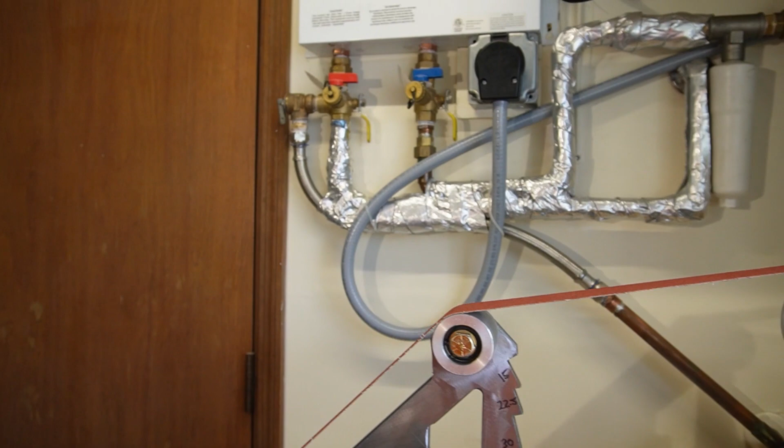Let me get you over here to the grinder, show you what I've got now. I figured I'd show you the finished product here first, and then go into some details. So here's what I've got. As you can see, I built all these pieces here in my part 3, part 4 videos. And for this video, I built the platen frame with the platen wheels on here and this tension handle.

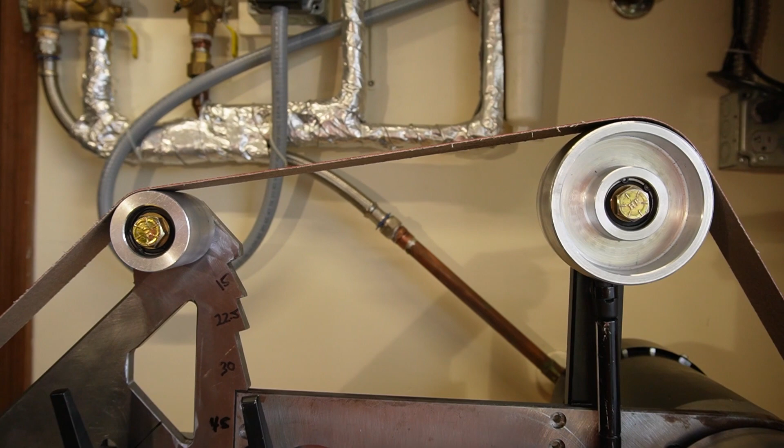Now this tension handle is quite different from Phil's design. His gas strut here is actually permanently affixed, and then he uses this lever to relieve the tension on the wheel when he changes belts. In mine, I've changed it quite a bit. I'm going to have to put the camera down to show you its operation.

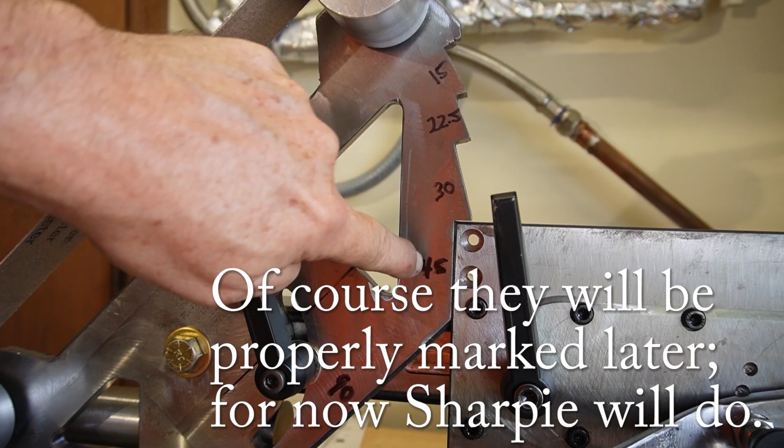And then another neat feature I've done on the platen frame is I've cut these notches here for various angles that you might typically want to use. So obviously there's my 90. I've got it currently in the 45 position just to show you here. But it makes a quick change to quite accurate angles on these guys. Very easy, which I like. Works well.

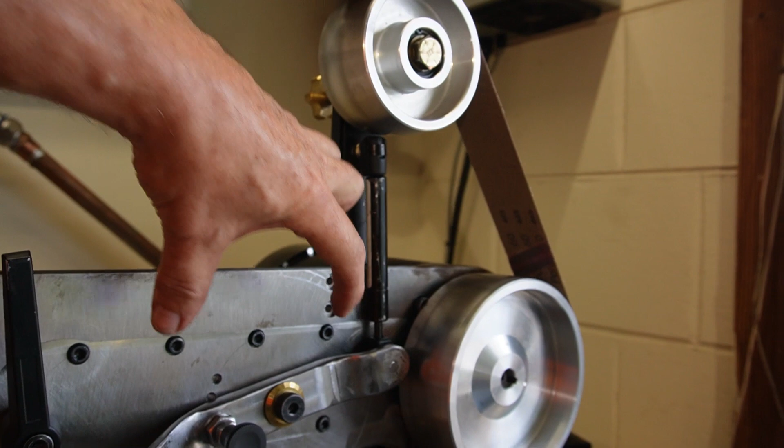And then my lever, rather than machining it out of pieces like Phil did, I just took a piece of, I believe that's quarter inch steel and bent it. I just put it in my vise, heat it up and hit it hard with my hammer to make this curvy shape, which I like. I doubled up the thickness here. I welded an extra piece in there to double it up for extra strength and extra bulk. For this, another shoulder bolt goes through there to hold it in.

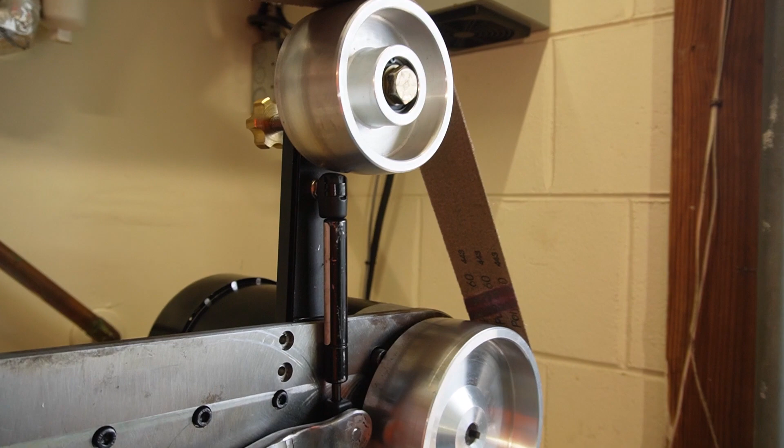And then I'm going to put the camera down here so I can show you the basic adjustment process. Now, this is really shaky. I can't be doing too much with this right now because I don't want it falling down. It's all too easy to do. But basically you would release this lever, which lets this main arm slide in and out, and then you release this, and that lets that pivot, and this, you release the pressure on the belt. All right, so you release the pressure on the belt first, do your adjustments, tighten things up again, and then you're ready to go, right?

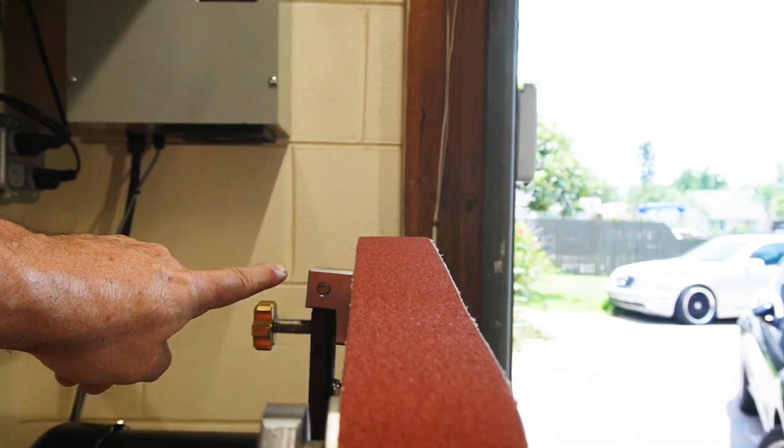Oh, I guess I need to pick this up again to show you the back side of this. That there is the tracking arm adjustment, and I made a nice little fancy knob for that out of brass. And I made another nice little knob here out of brass. Very simple lathe operations.

So let's see. I think I can show you this thing running at this 45-degree setting. And then I'll separately adjust off camera for the other settings. I don't want to do it on camera because it just takes too long when I'm worried about the thing falling off. Okay, I need 2 hands and I need to do it by hand. So let me tighten these guys back up in the 45 position.

Apply some tension again. Again, I've got various tension settings here that are according to what angle you have this at, because the belt gets longer here and shorter here as you tilt it, right? So the grinder changes dimensions basically. Okay, I think we're ready to go.

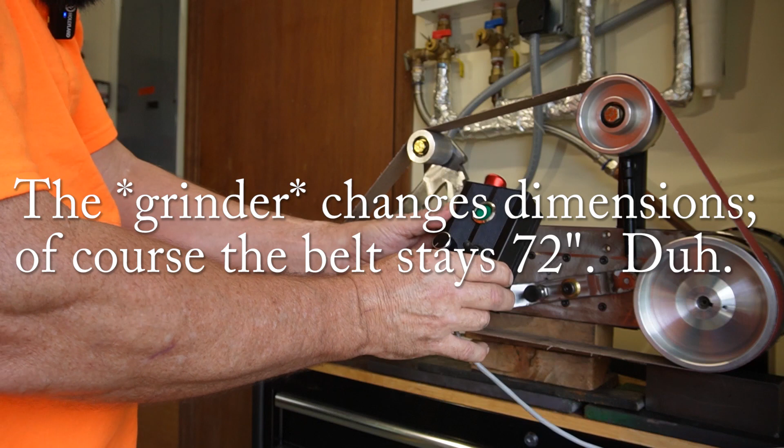So here's the remote control guy that I built in part 2 of this series. So I'll turn on the VFD, and then I'll put it in the forward direction, and then I'll give it some speed. And there it is, ta-da!

Now I'm not going to go terribly fast with this because, again, this is kind of shaky, but it tracks very nicely. The tracking wheel is very responsive. I've got it here so it's just tracking on the very outside of the 2-inch wheels, which is perfect. You can go around the corner if you're putting the part like that on there. It's quiet, it's stable, it's smooth. So okay, let me show you the other positions.

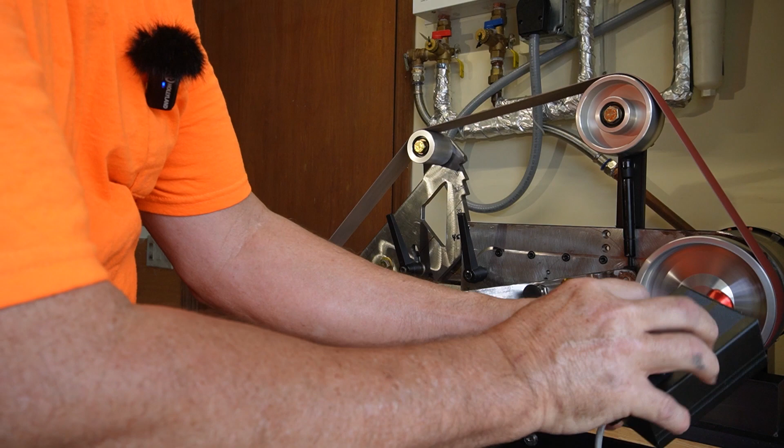So here we have it at its most laid out 15-degree position. Or if you look at it the other way, if you flip your part over on the table, it'd be 75 degrees on the other side. Take your pick. I don't have a Platen installed here yet, or the table, but you get the idea.

They're coming soon. Now here's the 30-degree position, which of course if you flip the part over would be 60 degrees. There's another one in between there, the 22.5 I'm not showing right here. It's half of 45 of course, which might be useful sometime. And here is the ever popular 45-degree position. And as I note there, the lever keeps moving down because the tracking wheel keeps moving up, so you get more pressure on the wheel that way.

And here's the 90-degree position, which of course is the most used. And the Platen frame there is square against the main frame, so it makes it a perfect 90 degrees every time.

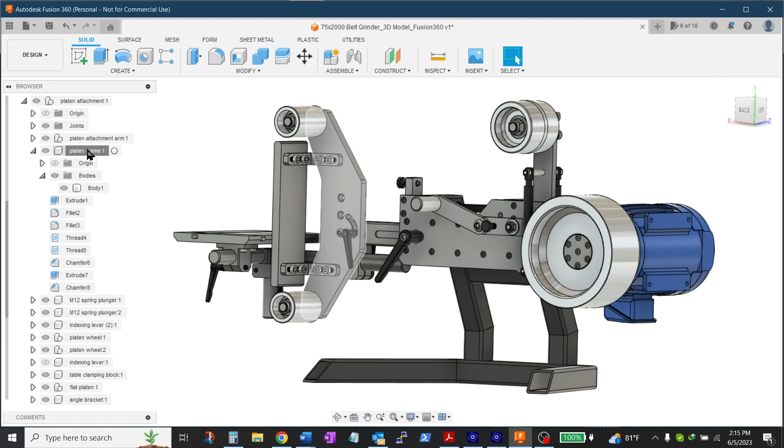So now I want to show the parts I'm going to be making in this video, starting with the Platen frame. It's the main part of this video. A few extra features from Phil's made it a little fancier. And the Platen wheels I bought off eBay just as a kit for this grinder, but the axles are going to be half-inch bolts. I need to make some spacers for them to fit on properly.

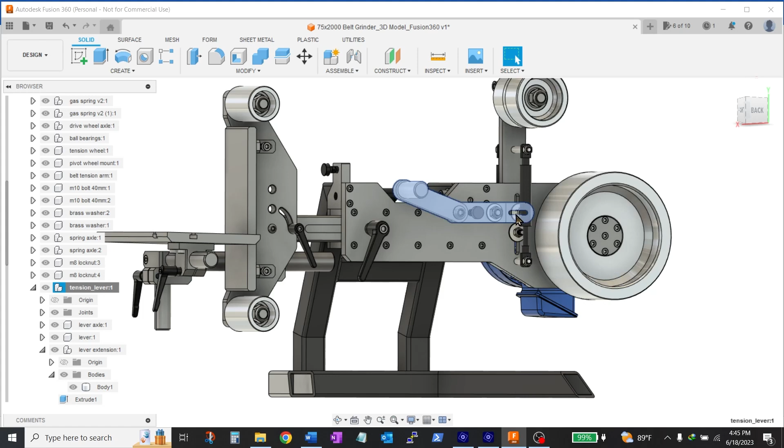I'm going to be making this tensioner arm. In my case, it's going to apply the pressure to that gas strut, whereas in Phil's it releases tension through this slot, pulling the strut down. I'm not going to be making the Platen or the Platen bracket. They'll be the subject of another video.

They're very simple anyway. So I'm going to start on the lathe making these very simple Platen wheel spacers, just out of 1-inch material I had lying around. This gets drilled out. There's 2 of them, so they get parted off here at the proper length with the DRO. Face down, making the second one here, and reaming out to 1/2 inch for the bolt.

Okay, over on the other bench where the grinder is going to live, I've got the motor attached to the main plate and the dovetail and the tracking wheel, and I had this piece in there as well so that I could put over an actual 2x72 belt to see how things are going to work out. And they're working out well. I mocked up this piece of wood before I commit this to metal.

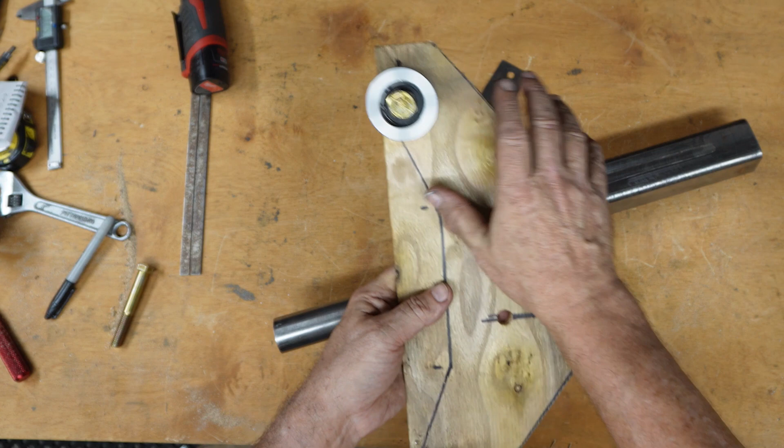I mocked it up in wood with these guys 12 inches apart, which is a little closer than Phil's. And then I was just playing with it, pivoting it on here to make sure I had the proper clearances with the main plate and so on. It's kind of hard to hold everything all at once. So I think my next thing I need to do is to actually commit to drilling this pivot point here that this main Platen plate is going to pivot on.

Phil uses a custom-made pivot bolt here, kind of fancy. I'm just going to use a grade 8 bolt. I think it's actually better and stronger. All the way through. I'm going to drill this through there and tap the end of it so the threads can tap in there. So now I've got my attachment arm mounted in the vise on its side.

You may recall that I drilled 3 pair of holes to attach the bracket here rather than 2 sets in Phil's design. So I need to be very precise about my hole going through here as it goes between the rear set and the middle set. There's plenty of room, I just have to be careful with it. So I'm going to do some center finding of these holes that are already there for the attachment bolts, and hit them in my DRO, and then pick the halfway point between them. That's where I'll drill my 1/2 inch hole.

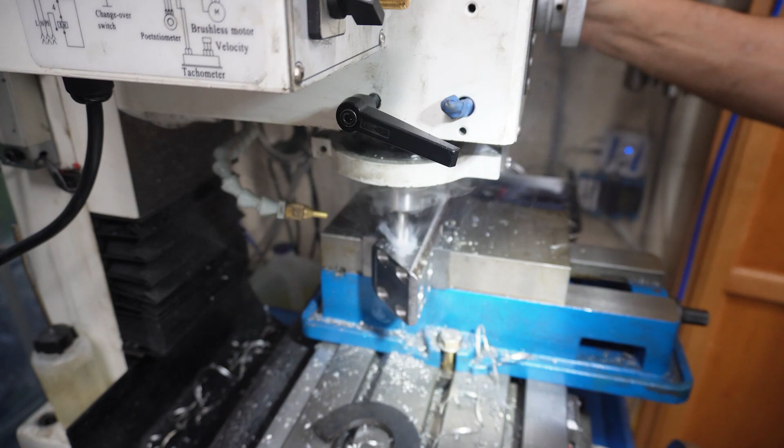And that looks perfect. So here's my mock-up, as I mentioned earlier, to test the dimensions. Looks like I'm doing good. I put the dovetail tracking arm in here and just clamped it in a reasonably high position. It can go up and down from there, a few inches up and a few inches down to adjust the tension automatically. But I have the wheel on the motor with the proper amount of space.

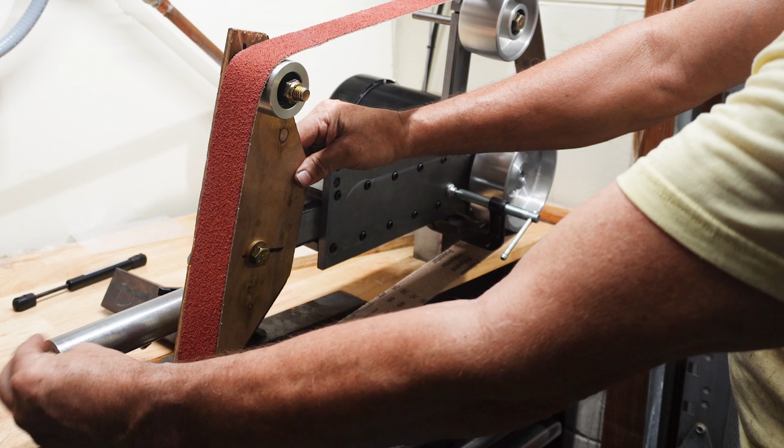It lines up with this. I put these 2 Platen wheels on this cardboard mock-up on the proper hinge point on the attachment arm here. Of course, the table will attach out to this thing out here. That's a to-do.

But with that tracking wheel in that position, this is just about the right amount of tension for this thing to be up square. Of course, there's a bit of flex since it's wood, but that's just about it.

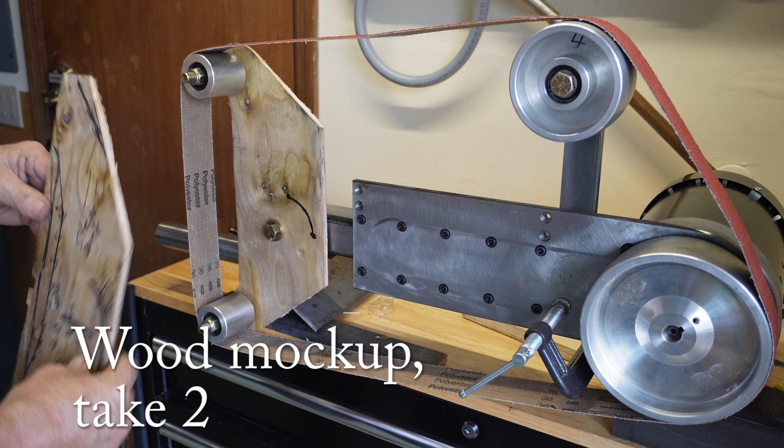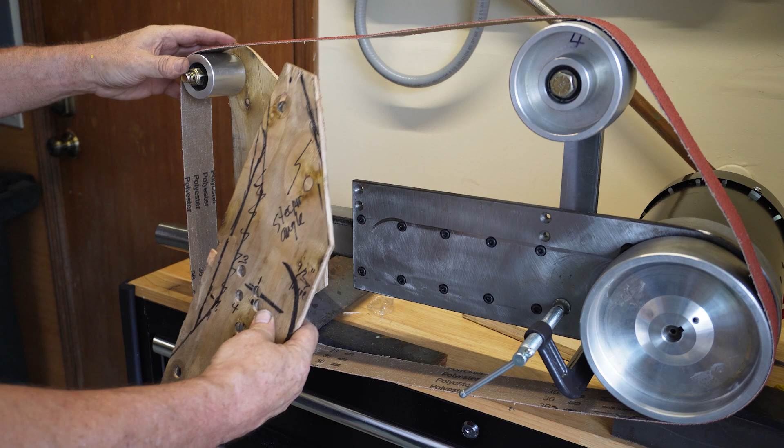So I spent a little more time this morning prototyping this in wood. It's a very important decision to get all the geometry just right. If I had a proper Fusion 360 diagram of this 2x72, I could save myself some time cutting wood, but I still kind of like the hands-on approach of really looking at it and seeing if everything's going to work out. So there's my original piece, and there's my original hole.

I had 5 different experiments here just to see how the geometry changes. There's always a trade-off, as in most things in life. As you lower this hole down, you get more grinding area, which is nice, but the effect of the tilt is much more pronounced on the wheels. This wheel gets a little longer, and this wheel gets much shorter. So you need more tension adjustment, or much more adjustability here.

Ideally, this would be in the center. Then both wheels would move at the same rate, one getting longer, one getting shorter, but then you lose quite a lot of grinding area. The other advantage of moving it further up is you get more ground clearance, but I've already figured out when this thing tilts horizontally, I need enough ground clearance to clear the motor, and that's plenty. My mount will be higher than this, so we're good there. I think it's a good compromise.

As I extend this out, this wheel gets a little longer, this wheel gets a lot shorter, so the adjustment arm has to move out to compensate. There'd be some compensation in the tension arm too, but it might only take up an inch or two, not as much as I need here. So that's the reason for this adjustment arm moving out.

When it's done, there'll be a lever clamp here, per Phil's design, that holds that in place, so I can get all the way out to flat across here with this adjustability. This slot here, I just freehanded. There'll be another lever clamp in here that bolts on to keep this thing from turning. So I've just laid out where the top and bottom need to be.

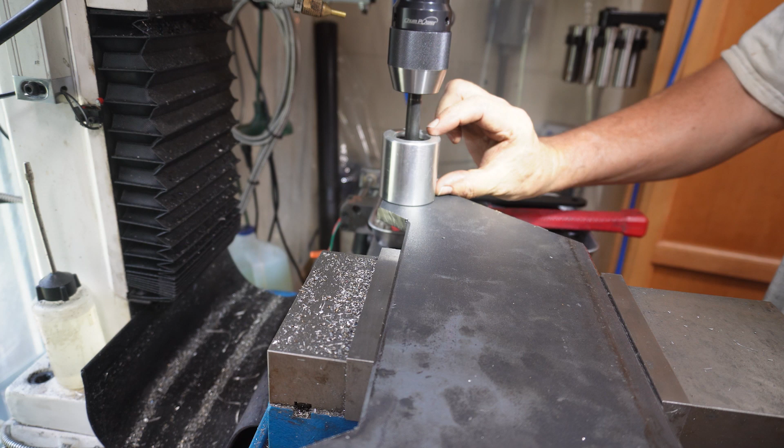Okay, I used my DRO to find the X and Y, zeroed them out, moved in 7/8 of an inch. This is a 2-inch wheel, so inch radius, so that'll give me an 1/8 inch overhang, top and front. Clearance is clearance—that's just in case the belt rides off the end of the wheel while you're tracking it. In normal use, it's going to sit in the center of this wheel. And the wheel sits a bit off the plate anyway, so this is just overkill to allow clearance over here.

But it looks nice anyway. So I'm going to have an 1/8 inch hanging over the front and back, and I just put a transfer punch in—a 1/2-inch transfer punch—as a hub for the wheel, just to test that it all looks good, and yeah, it does. I wanted to do that before I committed to the drilling. So now I'm going to drill that out for a 1/2-13 tap.

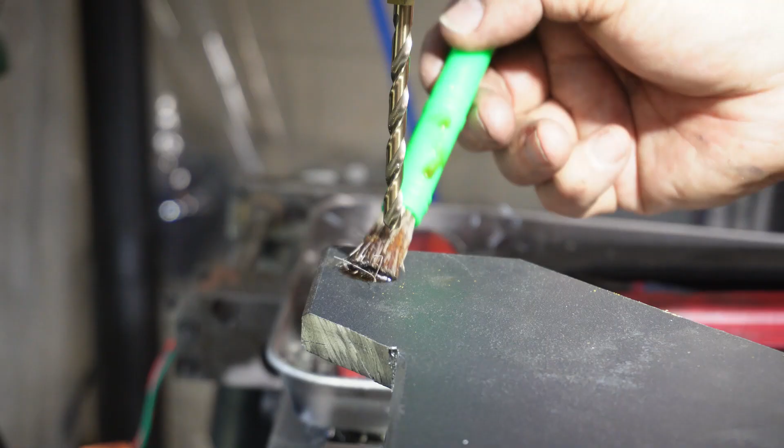So now I've just laid my piece of wood prototype on top of my bolt holes, and with a Sharpie marked where the center is. There's nothing precise about this—it can move within an inch or so of this spot, and the behavior of the platen changes a little bit, but not drastically. So there's nothing precise about this. I'm just going to drill my hole there at the Sharpie mark and ream it out to 1/2 inch for the hardened bolt that's going to form the pivot here.

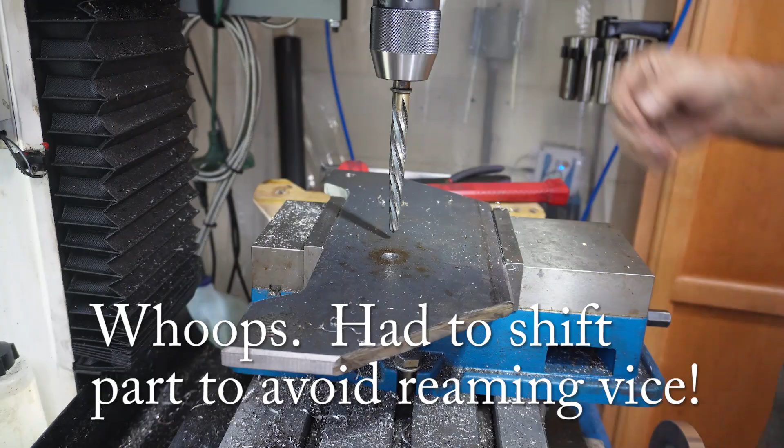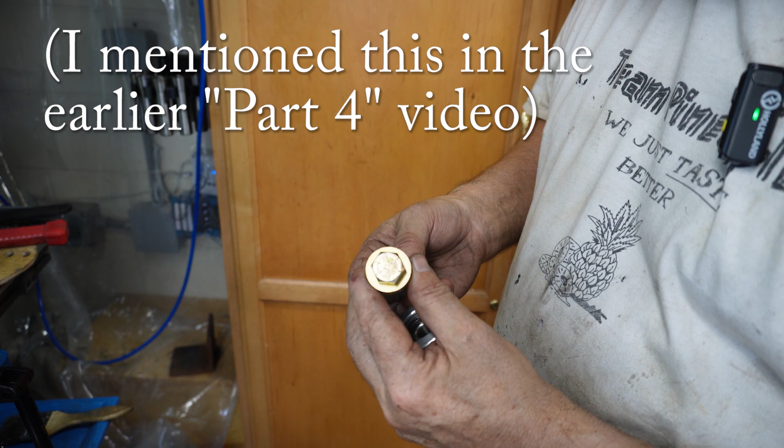As I mentioned when making the tracking wheel, each of these wheels has a retaining C-clip inside that, if I put one of my regular size washers in there, it will ride on the C-clip and bind, which isn't good. So I need to reduce some washers to just inside that C-clip diameter. The way I'm going to do that, I've mounted 4 washers here. I need one for each of the 3 wheels, and I put the 4th one on there just to give me some clearance—I don't want to hurt this piece.

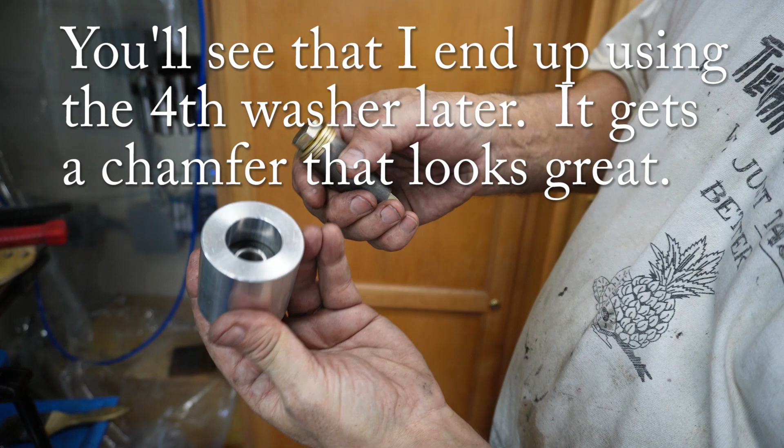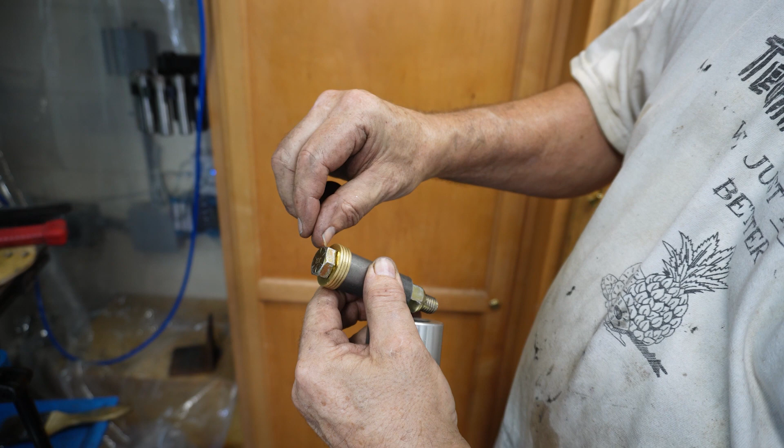These are the 2 pieces I made for my spacers for these platen wheels. So I put them on here on a 1/2-inch bolt, 4 washers. I'm going to put them in the lathe and take these washers down to just over the size of this outer facet of the bolt head, and that'll be the right size to fit inside that C-clip. Okay.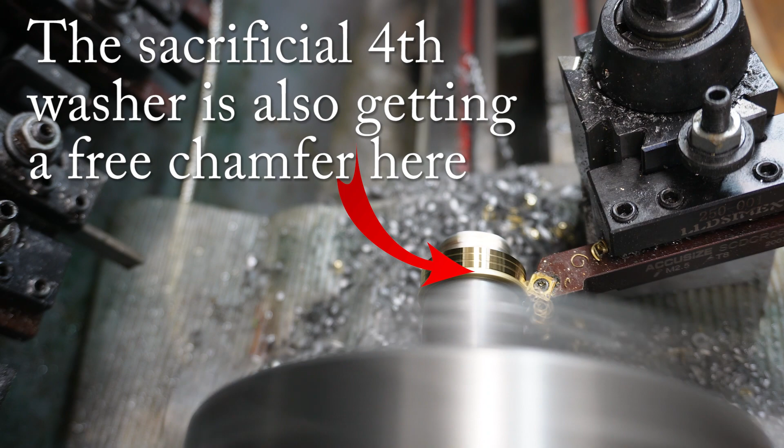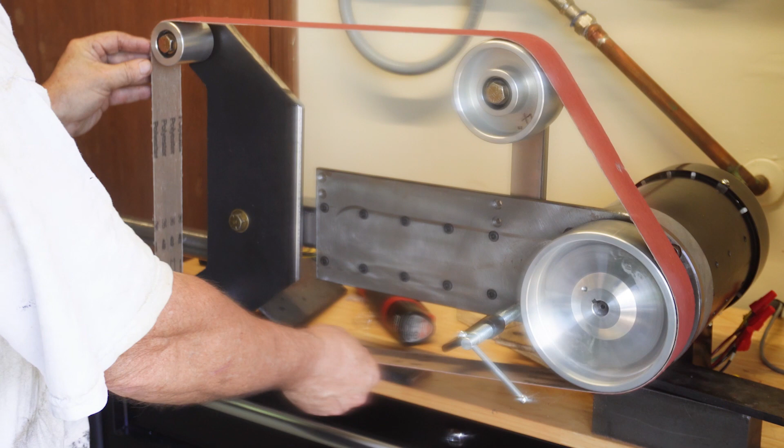So as you can see, I now have it assembled here on my bench in this sort of Rube Goldberg kind of setup. Again, I don't have my proper tensioner on here yet, but I've got a belt on here with a new piece of metal all bolted on, the proper spacers and everything working out well. I cut off the bolts on the end here so I can rotate it without interference. And then I just moved it around by hand just to adjust the tracking wheel and found I could get

it tracking center. And I thought, well, just for the heck of it, let's go really, really slow for a first test with the actual motor. It should be forward. There we go. Actual test. And it seems to be doing really well. It's tracking on here nicely. I did do a little adjustment on here by hand. So it's alive.

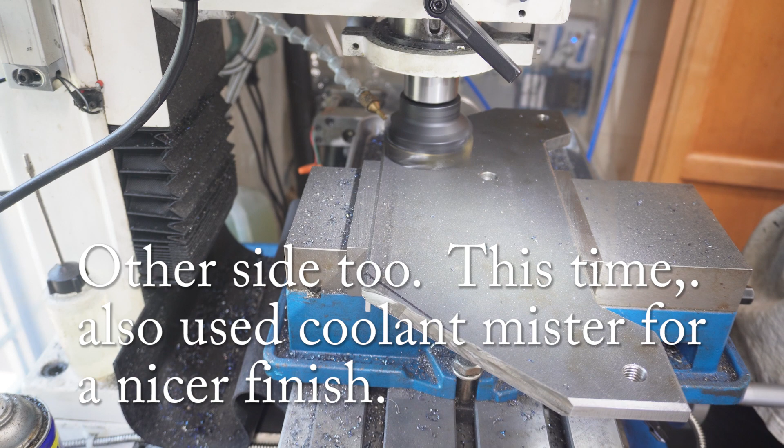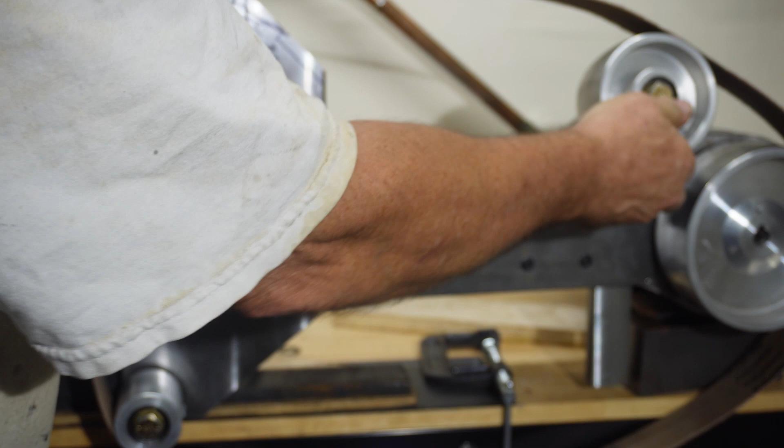Okay, so I've had this thought. I pointed out before, this is a perfect 90 now. If I bring that up there, that's a perfect 90, and the tension is good there. And I'm also going to make it a 45 cut, which I've done already. I made this a perfect 45, but I think it'd be better to actually notch this away so that this top surface also comes down flat on here. It'd be a positive 45.

And then I can do the same for a 30. These are just rough lines on here just to get an idea. But for a 30 degree, and of course this will push in a little bit, and for a 22.5, just common angles that you might want out here. Oh, I've also got a 15 up there too, don't I? That sort of lays it right out at 15. So I'm going to try this. I'm going to cut my 45 here first. I'm going to have to figure out a way to get my cutter in this way on the mill so I can get a square in there. May not be able to do it, but I'm going to give it a try.

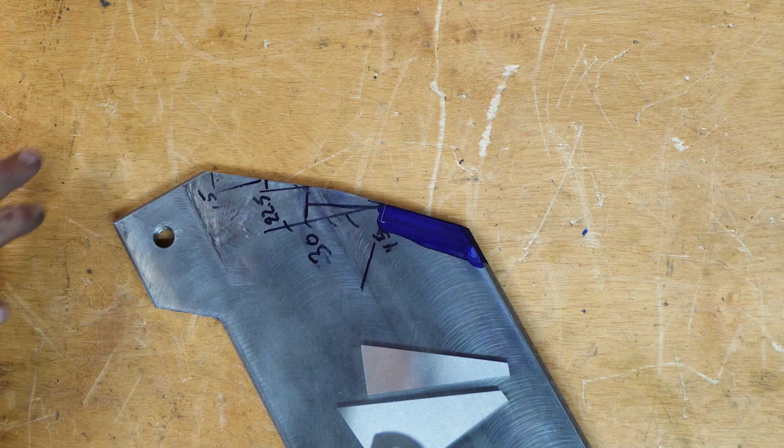Okay, over on the bench I've got this Dykemed up. I'm just going to cut my 45 first, and after I get it perfect, then I'll move to the next one, iteratively, as I do a trial fit each time. So I've got my line here that's going to match up with the top of the main plate, approximately. Being on the safe side, I moved it a bit that way. I'm going to make each of these notches 3/8 wide, and then this has to be a perfect 45, using this as the reference.

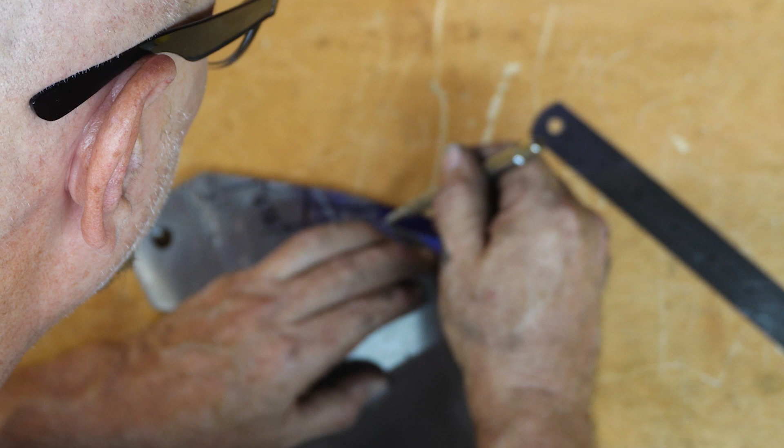So this will give me a 45. No, not a good one. Go this way. This will give me a good 45. Sure my head's in the way again. Scribe along there. So that's where I'm going to mill down to.

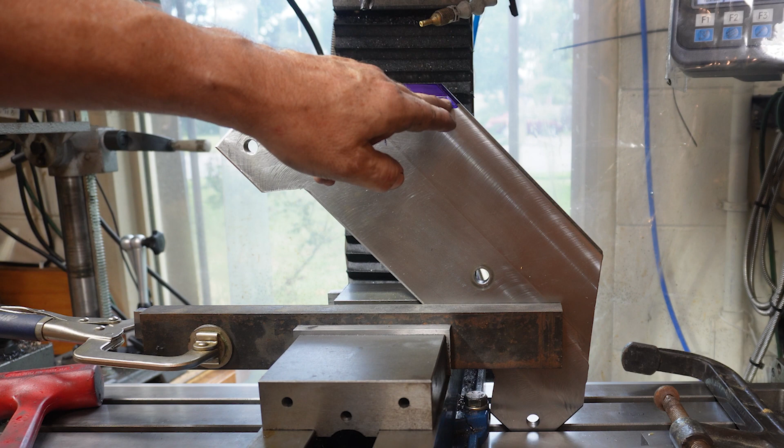So I've got another janky setup here in the mill. There's the line I want to cut across there. I'm going to reference onto here. It's not dialed in yet. This isn't tightened in yet. But basically I made myself a couple of rudimentary extension jaws with some heavy steel here. And I've got my plate down in the channel of my mill. I arranged my vise forward and back. I had just enough adjustability to make sure that opening here was down in the channel, which lets me get a little lower, which gives me a little more clamping force in here.

And then I've got a little spacer of the same material back here, just clamped onto the bar to keep the jaws square as it tightens up. So it's kind of janky, but I think it's going to work. If I tighten it up, it seems good and strong. I'll do light milling passes, obviously. But that's what we got. Oh, and I'm going to use this C-clamp here to further clamp these two pieces of extension jaw together around the piece to keep it nice and tight in there. All right, so here we go.

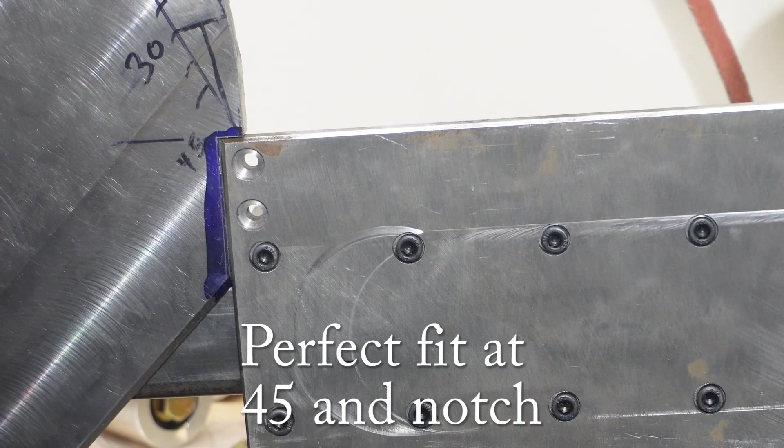Okay, the 45 is done. Now I'll just show you how I dial in. The next one's going to be 30 degrees.

So I don't really care what angle this sits at. Obviously it's not quite square. As long as I zero this here, it'll read accurately what that angle is there. So, 30.2.

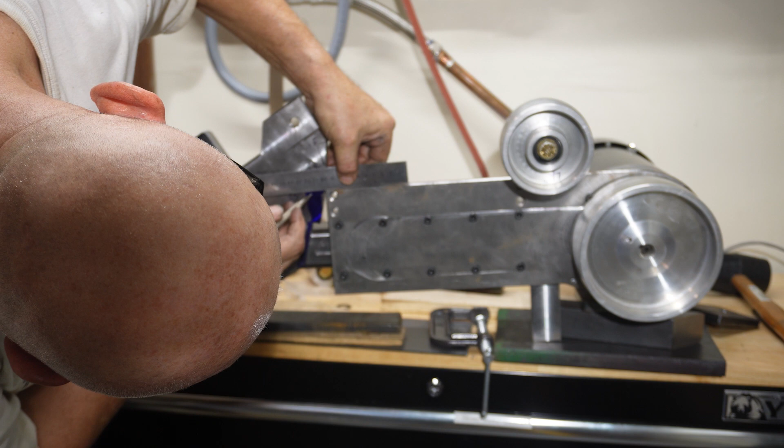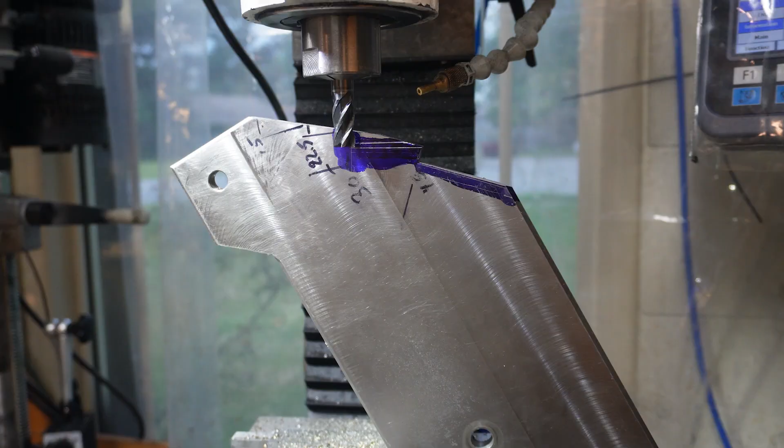Okay, back onto the mill. Got it clamped back in the mill here again, same sort of janky setup. And I've got it running true across here. I actually used a tooth of the mill to very lightly score just above my actual line, just to make sure it was parallel. So it looks like it is, so I'm going to now mill down to that second line.

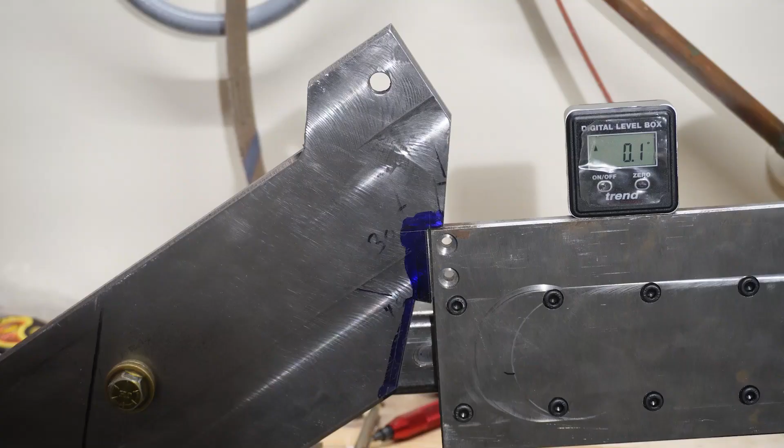Okay, there's the second one done, the 30-degree one done, and it's a nice tight fit. Fits in there just perfectly, hardly any daylight at all.

So the next one I want is 22.5. Now let's get this knocked down to there. 22.5, right there. So again, what's most important to me is to get this notch in the right spot without going too far. Right there.

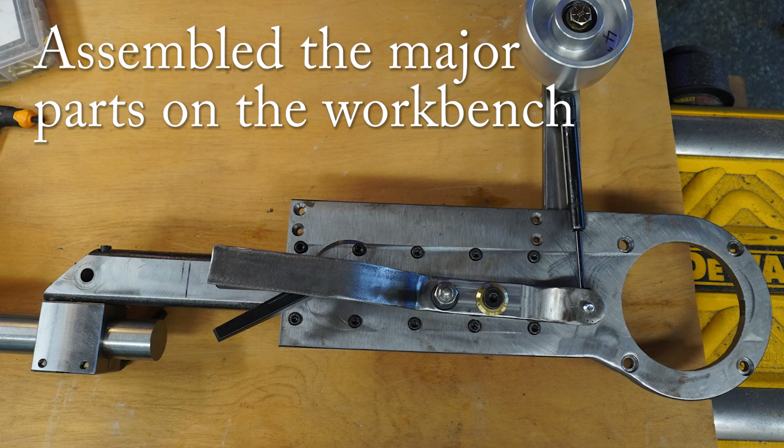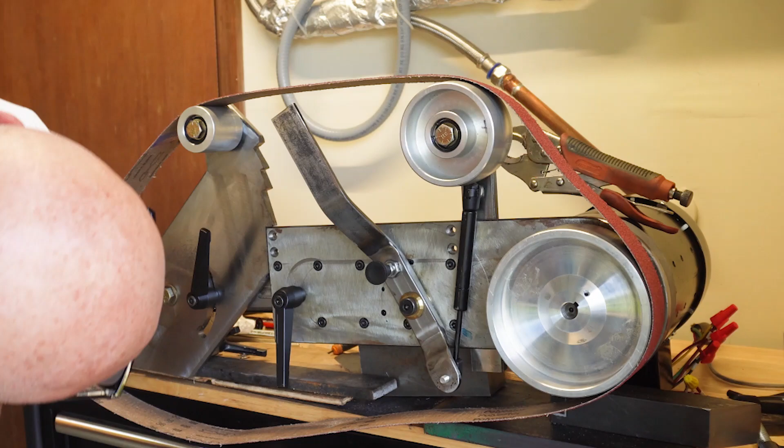And now with everything reassembled, I used some Prussian blue on the tip of the plunger to mark the best position of the lever arm for good tension in each of the positions of the grinder. And then I center punched the center of that Prussian blue, and I repeated this for each of the positions until I had the complete set like this.

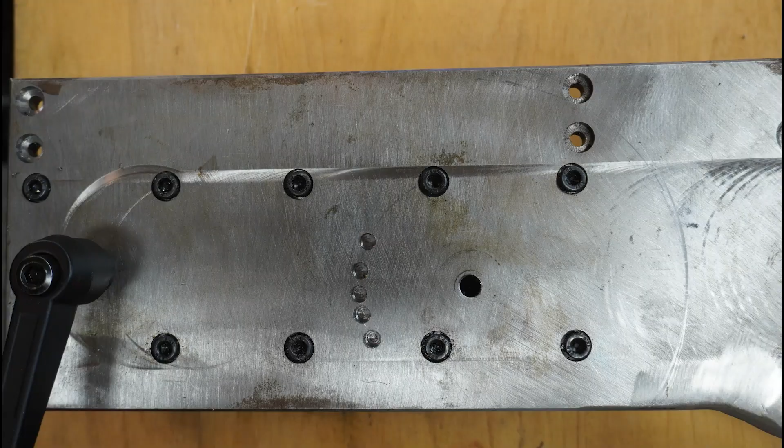Then I, of course, center found and drilled them out to a consistent depth for the plunger. And here's that final result. Made a brass handle for the tension lever.

Don't have my compound installed here, so I'm using my right hand just to move it out, put a little bit of a taper on it. And then I went down and every 1/4 inch put a consistent groove depth just along its length to make it look pretty.

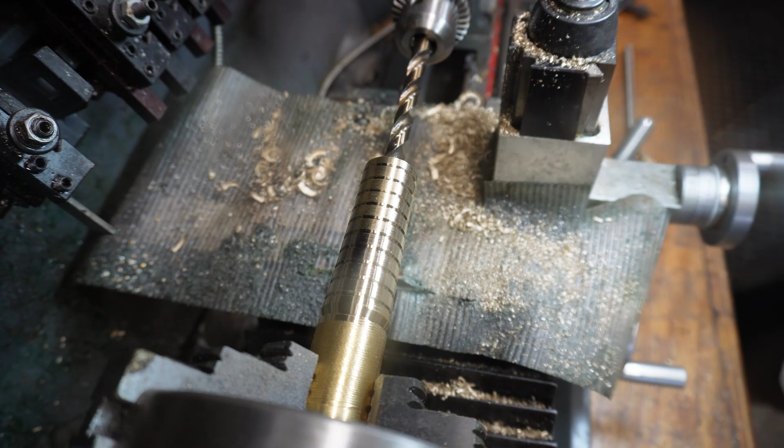And then I drilled and tapped it to, I believe it was an 8mm threaded rod I'm using here to attach this to the tension lever. Of course, then I did the corresponding thread and tap of the tension lever itself and rounded over that end as well. I also made a simple brass knob for the tracking adjustment screw.

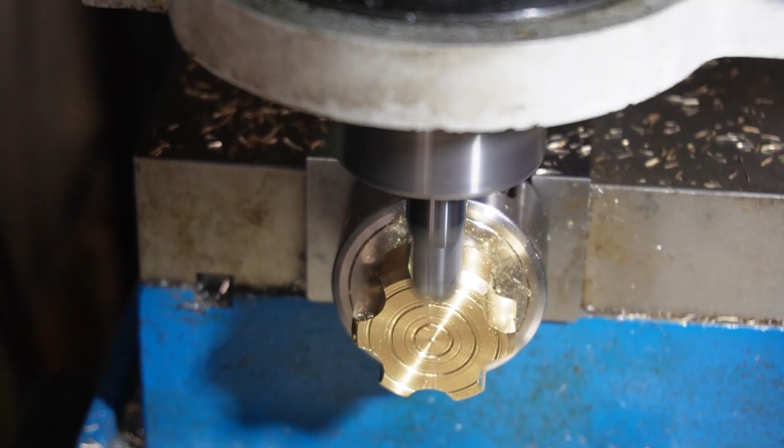There I'm drilling it and tapping it for 12mm to a shallow depth. And I mounted a 12mm threaded rod with retaining compound and put it in the mill in one of those 6-sided hex collets so I could mill out 6 little knuckles like this to make it look pretty.

So as I was nearing the end of this phase of the project, I had the great idea to cut out these triangle features in the Platen frame for visual appeal. It turned out to be a lot more work than I'd anticipated. Doing the 90-degree parts were easy enough, but getting the reach to those diagonals was hard with my mill dimensions. I had to do several different setups.

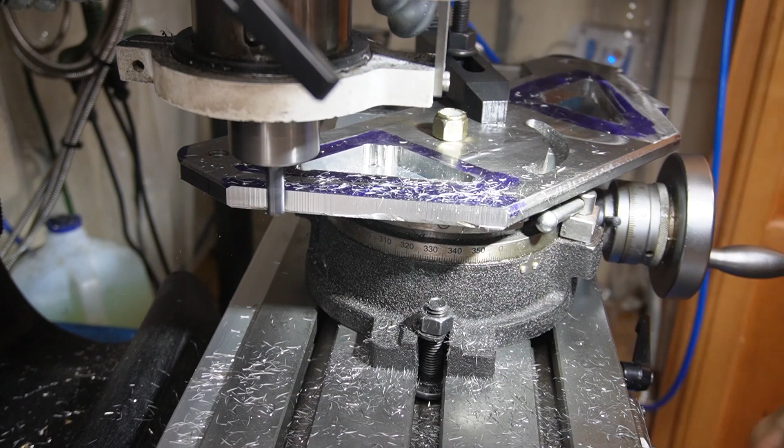I started by cutting the holes out roughly with a drill. And here I am just finishing the one edge of the Platen frame I hadn't done yet, on the very bottom surface, to that angle that's the same as the triangle inside. There I am doing the triangle.

Then there was about 2 more setups to get the rest of this thing done, so it took quite a while, longer than I thought again. Of course, chamfering that edge as well. And I cut out a lot of footage here because it's just pretty boring stuff, but I'm happy now that it's done.

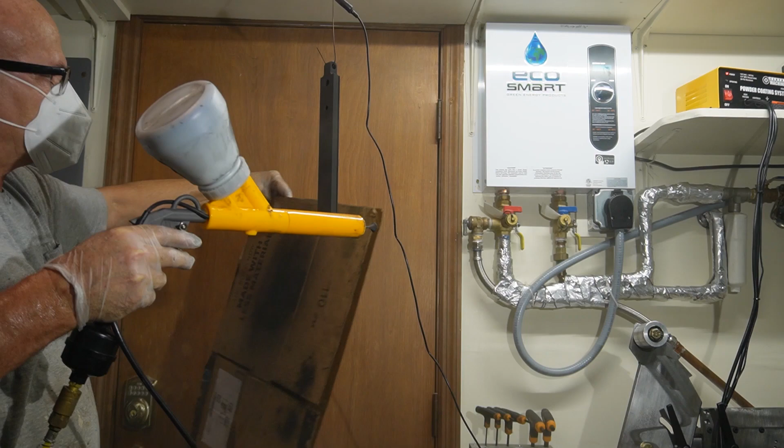I mentioned in an earlier video in this series that I had a little excess play in the dovetail of this tensioner arm I wasn't happy with. I figured a little powder coat would add some thickness to reduce some of that slop, and it really did help quite a bit. Here it is baking in the oven.

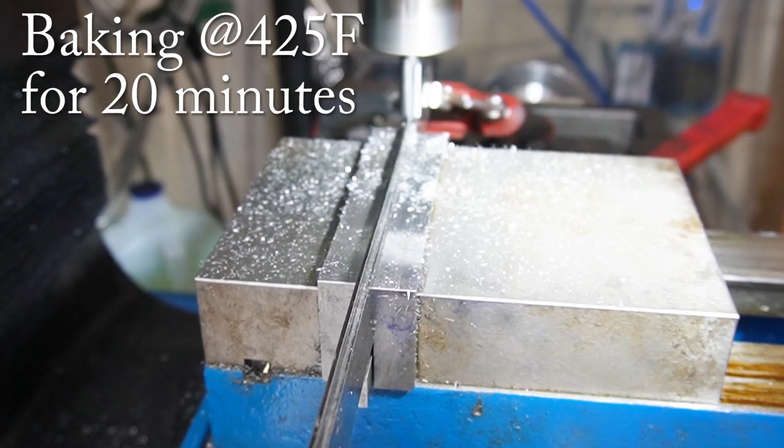But I found I also needed to put a little shim in behind it. An 8 thou shim was just perfect behind the dovetail to take out that play. And here's just me trimming that shim to width in the mill.

So we finally come to the end of part 5, and I apologize again for the length of this video. We'll wrap up by showing the grinder again, 4 of its 5 positions in action here, and then talk about what's next, which is going to be building these 2 brackets that attach the grinder to its stand and allow it to pivot horizontal and vertical.

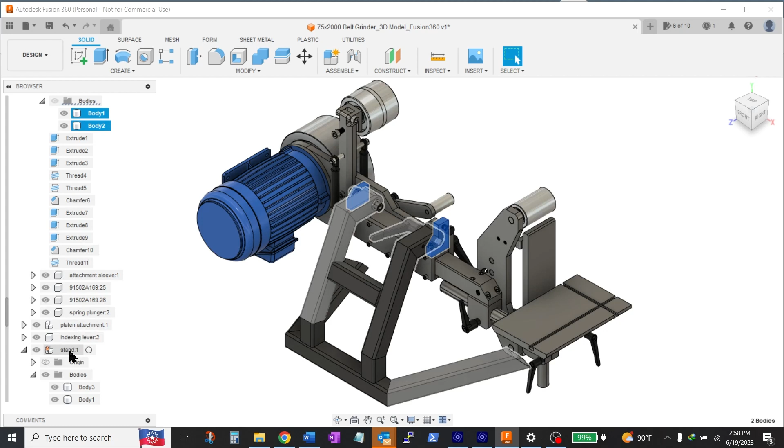And then, of course, the stand itself, which is going to be a pretty heavy-duty 2x2 square tubing affair that's going to be TIG welded up. So it's going to be a lot of TIG welding and some cutting, but very little machining in the next video. I hope you join me, and thanks again for watching. Bye for now.